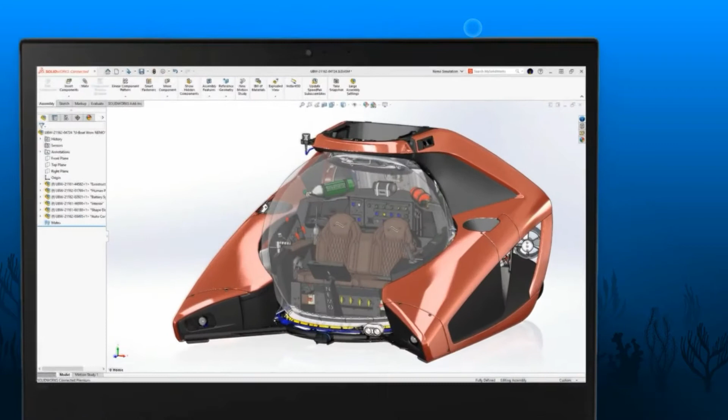When it comes to the battery compartment and skid, he has a few remaining tasks. With a depth rating of 100 meters, it is critical that the battery compartment can withstand the pressures beyond that depth to ensure safe operation. At the same time, weight and cost must be reduced wherever possible.

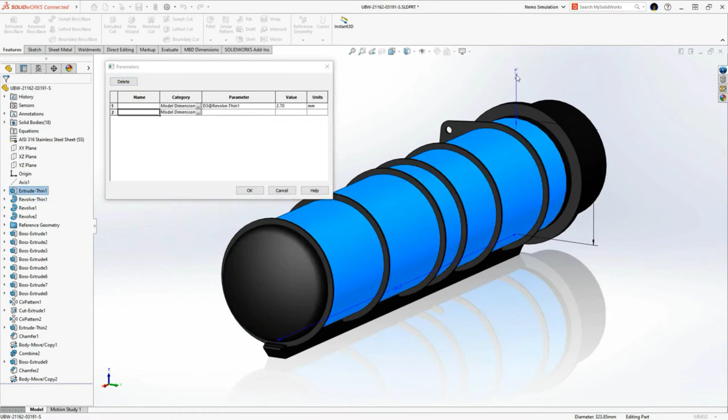Adam considers the thickness of the steel tube and stiffeners, and defines the associated dimensions as parameters to be optimized. He saves the updated model to the platform and launches the Model Assembly Design app to start the simulation process.

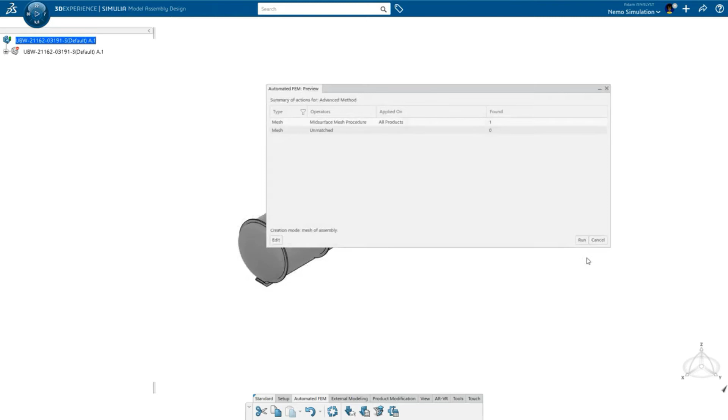First, a mesh is created. The automated FEM recognizes the thin components of the model and creates mid-surfaces and associated shell mesh bodies all in one command. Next, Adam creates the structural scenario that defines the loads and boundary conditions to simulate the maximum designed depth rating.

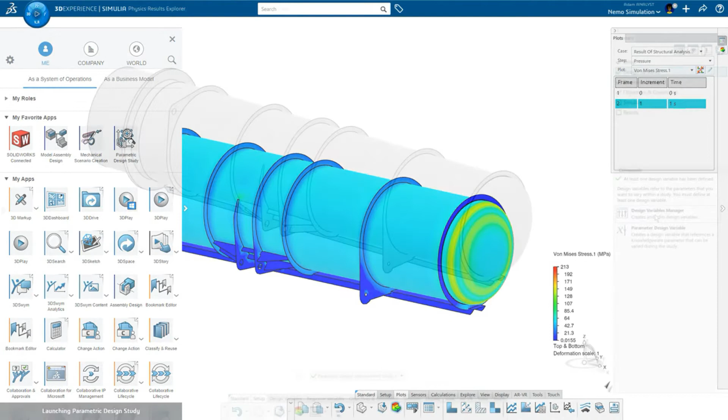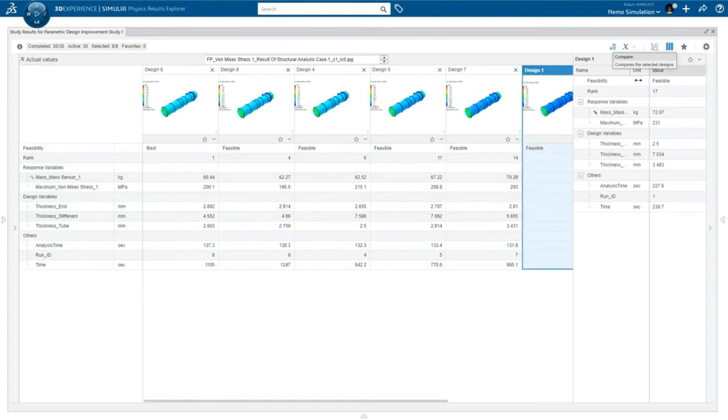At first glance of the results, it is obvious the structure is over-designed. Adam launches the Parametric Design Study app, selects the parameters and goals of interest, and lets the computer do the rest of the work. When the study is done, Adam can easily interpret and compare the performance of the various configurations. The best design is even highlighted for him, and with one click, a new model and study using the optimal parameters is created, so Adam can take a closer look.

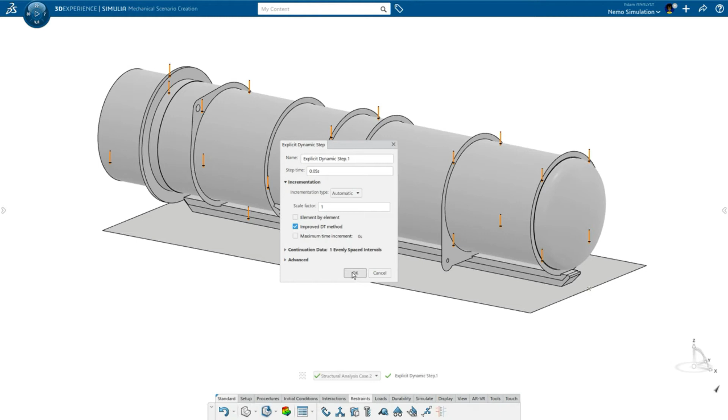But he has additional tasks to complete first. The pressure load on the battery compartment happens multiple times throughout the life of the Nemo. Another loading condition that repeats is the impact of the skid landing during storage.

To simulate this secondary loading condition, Adam creates an explicit dynamic study to accurately capture the rapidly changing stresses of the landing cycle. How exactly does the skid come in contact with the floor? Adam lets the solver figure that out with one simple yet powerful general contact interaction.

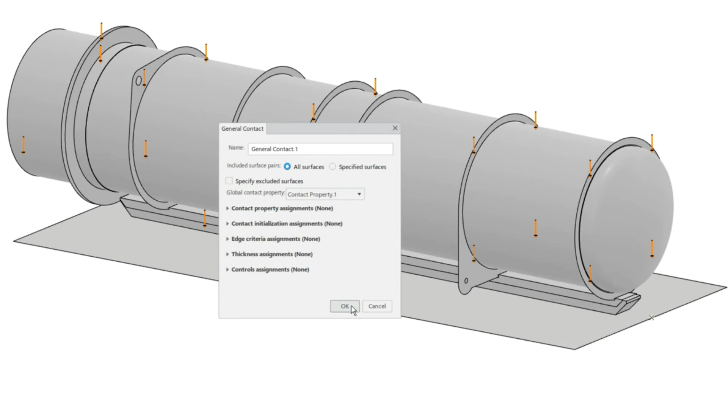To greatly decrease the solve time, Adam chooses to run the simulation on the cloud, leveraging its high-performance computational power. Adam can even shut down his computer while the simulation runs.

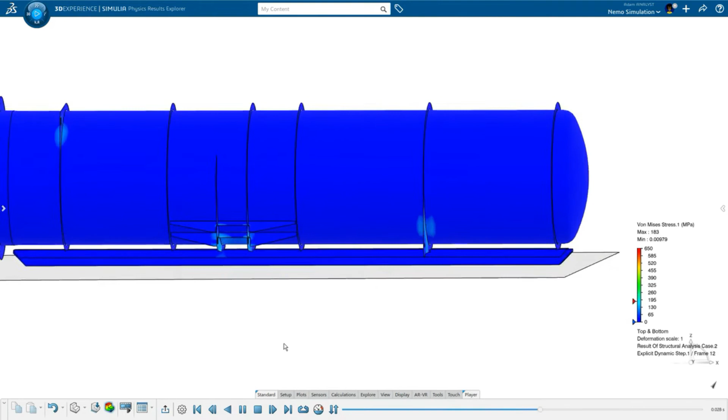The stress values are within an expected range, but how many times can the Nemo withstand both this and the pressure load? To reveal the answer, Adam sets up a durability study.

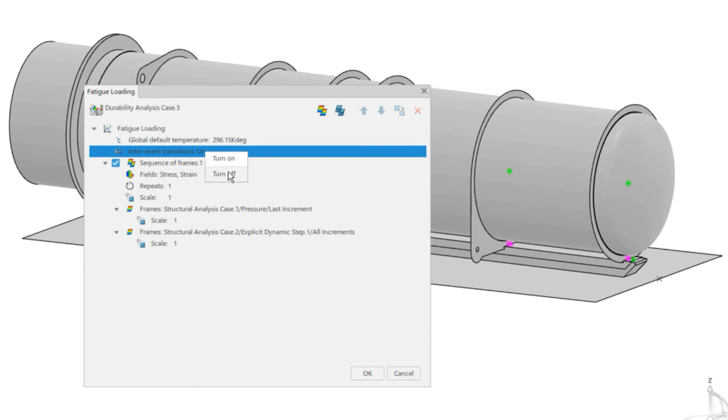He defines a fatigue loading that captures both events. For the explicit dynamic results, he includes all increments to account for the fluctuations in the response. Adam also includes both stress and strain in the calculation to improve the accuracy and solve for both high and low cycle fatigue.

Both sequences occur in the loading history, but they are exclusive events, so he turns off the inter-event transition option. Lastly, he defines the base surface finish and solves for the results. The results are not only available to Adam, but they may be viewed by other collaborators from their internet browser, so everyone can get the latest information instantly from one place.

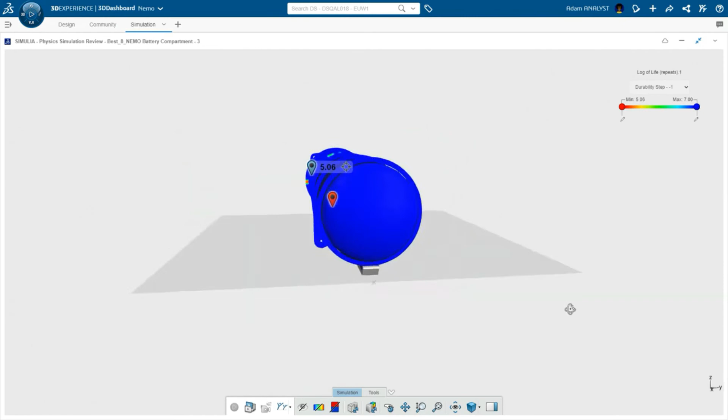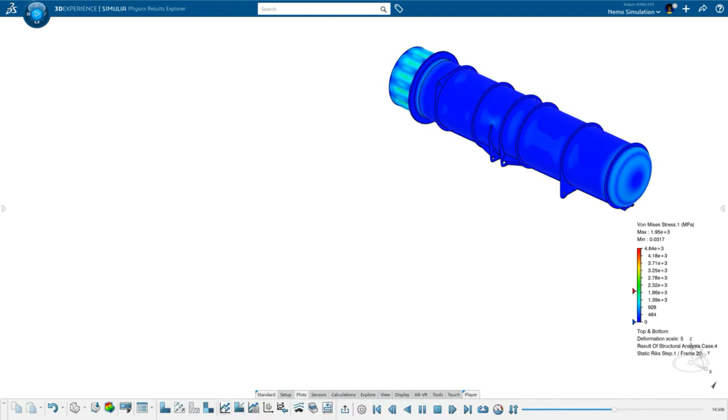Adam's last task is to identify when and where ultimate failure may occur if the Nemo gets too deep. Leveraging the same study setup from the first scenario, he defines a Riks buckling step, which goes further than the typical eigenvalue buckling analysis. It's well suited for an unstable and nonlinear collapse of the structure, and it doesn't require setting up a more complex dynamic analysis.

Processing the results is simple too. Adam plots the load factor and visualizes which areas of the compartment will fail first.

By using the 3DEXPERIENCE platform to explore numerous design options, evaluate durability, and understand critical loading events, Adam and his team were able to make informed, timely decisions to help fulfill their safety and certification requirements.